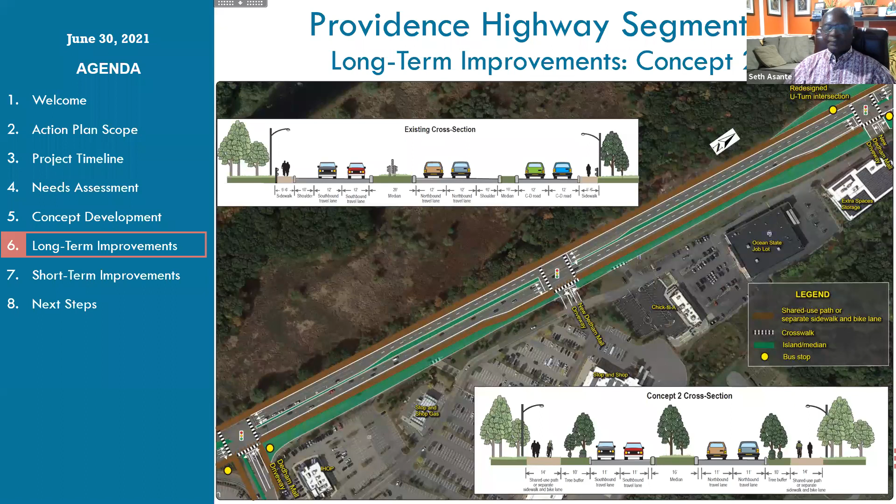This is the concept we developed for the U-turn intersection. We converted it into a signalized T intersection with connection to the mall internal road system. This concept also puts all the traffic on Providence Highway or VFW Parkway. Crosswalks are provided to connect to the pedestrian and bicycle facilities. It also includes bus stop locations for the Route 52 bus service, shown in the yellow small circles.

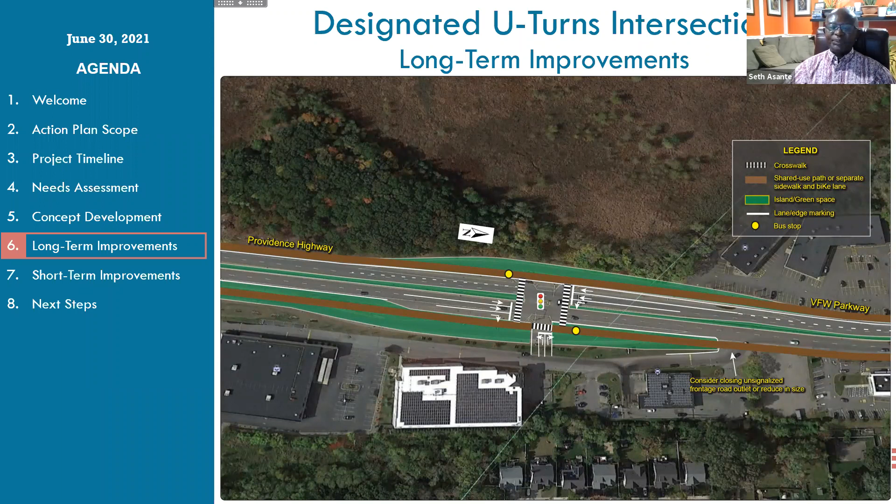Now we move on to the VFW Parkway segment in the Boston section. Here, the existing roadway has sidewalks, shoulders, and is a 4-lane roadway with 2 lanes in each direction. However, there are no bike facilities in this section.

The concept we developed for this segment has 2 travel lanes in each direction, pedestrian and bicycle facilities, a 6-foot tree buffer in each direction, as well as a median.

We also propose opening the median at 8th Street and signalizing the intersection to allow for turn maneuvers, as well as opening the median at A Street and allowing turn maneuvers. This will further reduce the circuitous traffic circulation in the segment, as well as reducing congestion at the Spring Street intersection.

Additional improvements include adding 3 bus stops in this segment for the Route 52 bus service.

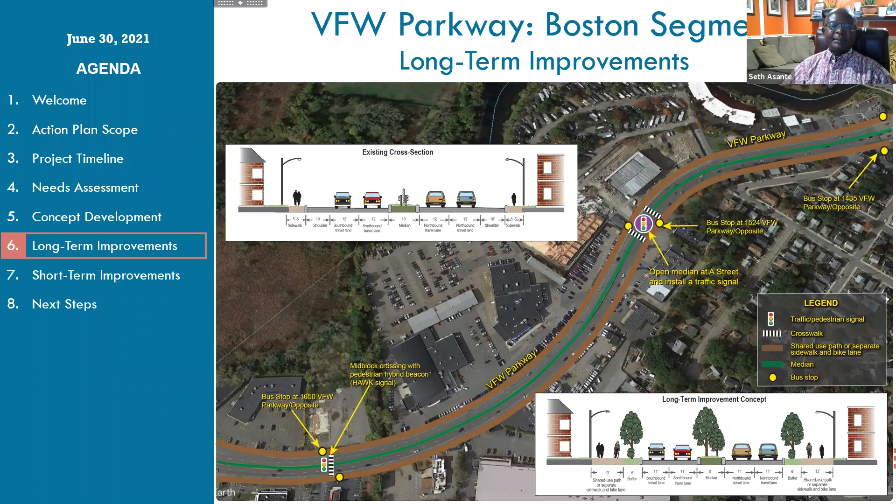Okay, so this ends the long-term improvements. This long-term improvement, as I mentioned, is for transforming the corridor into a route for all users.

At this juncture, I'm going to pause here and allow your feedback and comments on the long-term concept. We also encourage you to use the chat functions and the raise hand feature to provide your comments. Seth, thank you for that.

I just want to interject, Christian, if I may. I think you'll notice that while we had a concept for the Marine Rotary, there wasn't one for the VFW Spring Street intersection to the north in West Roxbury, Boston. We discussed this at the first meeting, that MassDOT, the state agency that regulates our highways, has been conducting what's known as a 25% design concept for that intersection. For this process, realizing MassDOT was already advancing a design, we did not take that on. That was not part of our scope of work.

The thing to note is that's been pushed back in the queue for funding, much later than we anticipated, to late 2020s. One of the things that came out of that is it's a tough nut to crack, that intersection. The left-hand turn going north at the Spring Street intersection is, as everyone knows, very backed up. We think some of what we've proposed as part of this process will alleviate that by adding a few more stoplights, which will actually reduce that queuing.

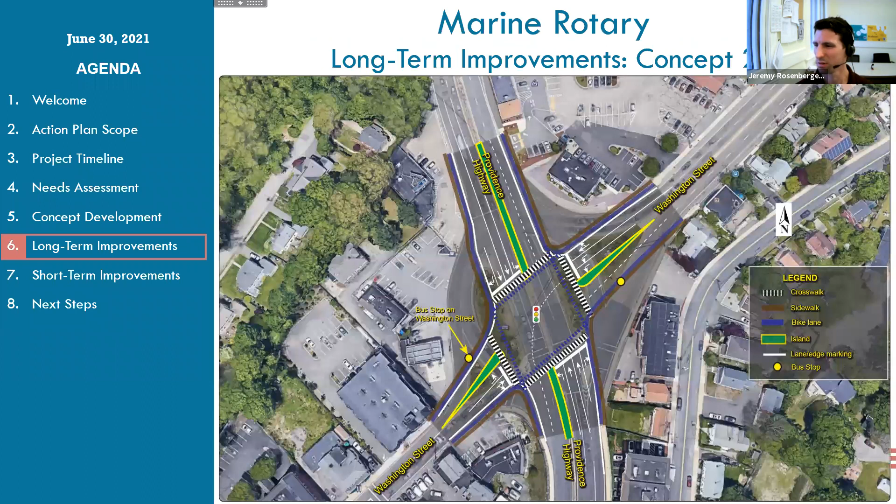Can we go to that slide if you don't mind, Christian? Absolutely, I believe it's right. Go back, one more. Forward, keep going, one more. Nope, back the other way. It's fine, one more, one more. Sorry, right there. Okay, I think that's a good visual. I don't know if Seth, if you want to handle this. Okay. And this is regarding: can the bike lane shift, and why did we put it here?

If I'm correct, yeah. So these are concepts. There's a next step that will do an actual survey and come out with a 25% design. Where we have it now is not fixed, it will be determined during the functional design. A lot of input will go into these concepts that we've developed, which will be advanced to the 25% design. So we could move the sidewalks and bike lane to get away from the roadway, but I want to emphasize there is still much more freedom to play with these concepts. I think that's the great thing about, especially this section, as I alluded to earlier, this is a very wide right of way. The right of way means the area that the state owns, and we can program for multiple uses. I believe it stretches up to 120 feet.

Hopefully I'm not exaggerating that number, Seth, but there's a home for everyone here, which is the great thing. I noticed in some chats, folks asked if we've reached out to the business and property owners along here, and yes, we have. We've had sit-downs with them because changing this carriage road has impacts to them and access to their intersections. But they also want patrons and employees to be able to get to their businesses safely. By providing these signalized intersections and getting rid of the free-for-all raceways, it provides the safety they want and makes it more desirable to come here. Providing all these amenities also makes it more desirable. So far those conversations have gone great, and we'll continue working with property owners to ensure their needs are addressed and issues aren't negatively impacting them.

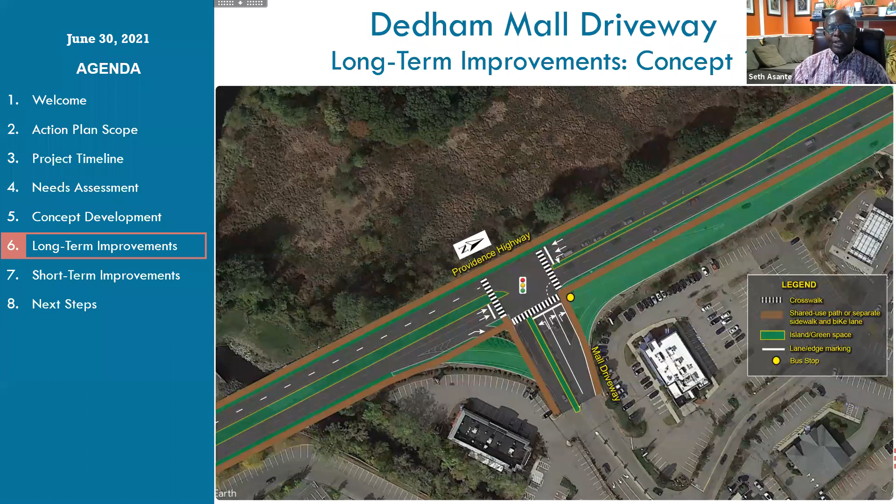As I mentioned, the character of Providence Highway and VFW Parkway varies along the corridor. For Providence Highway Segment 1, the right of way is about 84 feet. When you move to Providence Highway Segment 2, it's about 114 feet, so we have more room to move the sidewalk or bike lane out of the travel lane. So yes, that's possible, but not in Providence Highway Segment 1 or the Boston VFW Parkway segment where the businesses are close to the roadway. Depending on the section, we can make adjustments to move the sidewalk and bike lanes away from the travel lanes.

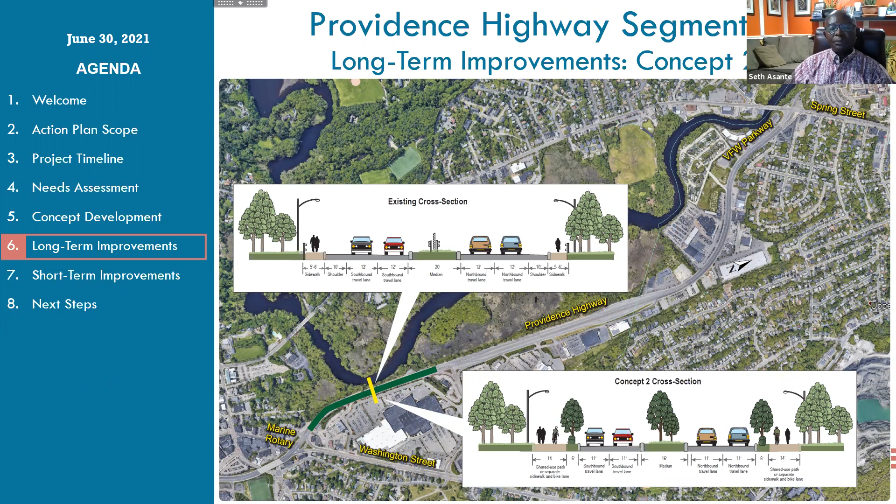We got a couple questions about eliminating the U-turn at the car wash. Most were concerned about how eliminating it might aggravate existing conditions on Bridge Street, and folks are wondering what the impact would be on things like level of service and congestion in that area. I'll let Seth handle that one.

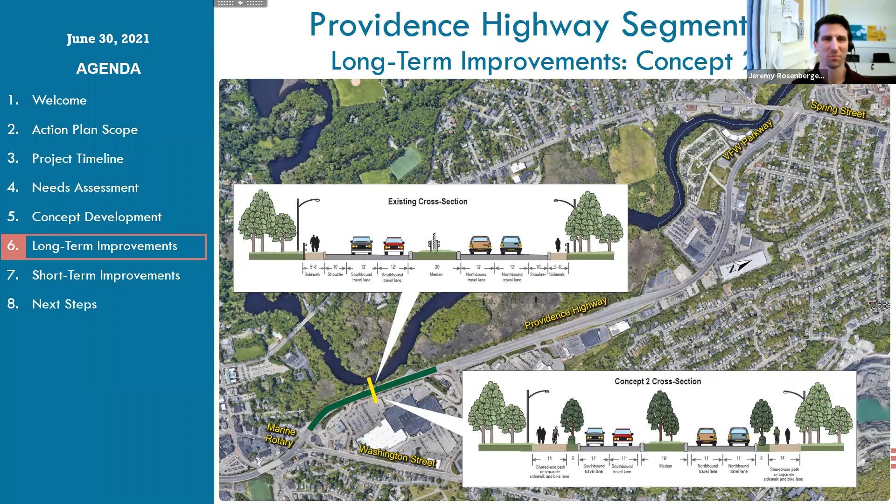So our analysis indicated that if you open the median at A Street to allow turn maneuvers, it can prevent traffic from having to go to the U-turn intersection to turn around and go north, and also people heading northbound to Spring Street making a U-turn to go south. Within Providence Highway Segment 2, we have 3 signalized intersections in that area, so all these additional intersections and openings actually help reduce congestion at the Spring Street intersection.

I might add too, where the existing U-turn is, where we're proposing a signal, we wouldn't be eliminating possible U-turns occurring there. They still would be allowed. It's just that we're eliminating those slip ramp type U-turn maneuvers that are occurring today.

Another question we received a couple versions of was about the service roads or carriage roads. Some folks are wondering if removing the service road would add roadway friction to the main roadway, feeling like the service road makes the corridor more drivable now. Seth, would you speak to the rationale for removing the carriage roads?

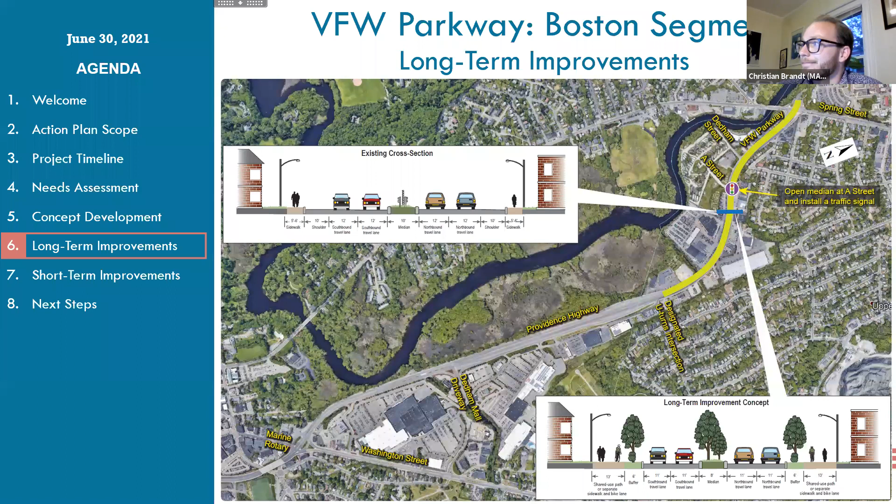I think we do need to move on to the short-term concepts, and I think in some cases the short-term presentation that Seth is going to give might answer some of your questions that we may not have gotten to. Okay, thank you Jeremy.

And Christian, so obviously, as Jeremy mentioned, the long-term concepts are going to take some time to implement. And because of that, we created short-term improvement concepts that use or modify the existing roadway features to improve safety and also create space for accommodating pedestrian and bicycle. As I mentioned, I will describe the short-term improvement starting from the Marine Rotary and then head north through the corridor.

We did this and analyzed the whole intersection again, and by changing the crosswalk distances and also moving them to make it safer, it will not impact much traffic movement at the Rotary.

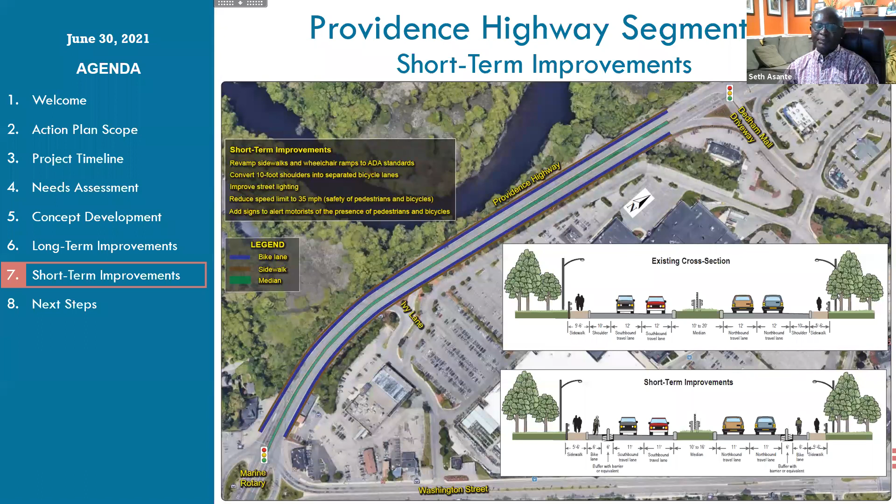At the Dedham Mall driveway intersection, the short-term improvements include upgrading the sidewalk. Currently, there are no crosswalks at the intersection. So the improvements include upgrading the sidewalk and wheelchair ramps to ADA standards, adding crosswalks and accessible pedestrian signals at the intersection to make it safer for pedestrians, including installation of bicycle detection and extending the bicycle lanes through the intersection safely, and additionally adding more signs and pavement markings to alert motorists of the presence of pedestrians and bicycles.

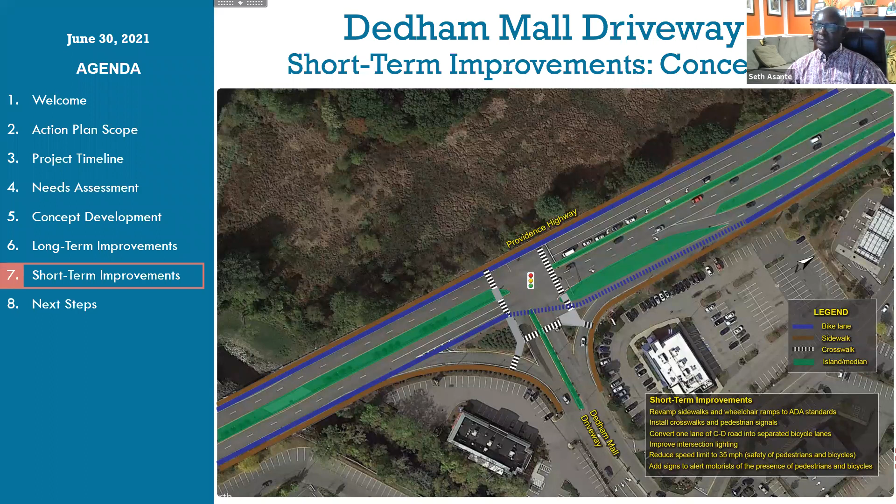For the Providence Highway Segment 2, the short-term improvement also deals with poor sidewalk and wheelchair ramps and bike lanes. We propose upgrading the poor sidewalk and wheelchair ramps, reducing the lane widths to calm traffic, and converting the 10-foot shoulders on the west side of the roadway into a bicycle lane, and to the right, taking one lane off the carriage road and converting it into a separated bicycle lane with physical barrier separating the bicycle lane from vehicular traffic, and adding more crosswalks in the vicinity to facilitate pedestrian crossing. The short-term improvement concept is shown at the bottom of the slide.

For the U-turn intersection, the short-term improvements include upgrading sidewalk and wheelchair ramps, adding a crosswalk at the intersection to help pedestrians cross, and connecting the bicycle lanes in the segment. We are also recommending additional signs to alert motorists of the presence of pedestrians and bicycles. Another improvement in this segment is to close the slip lanes for through traffic at the intersection to improve safety and reduce speeding in the segment.

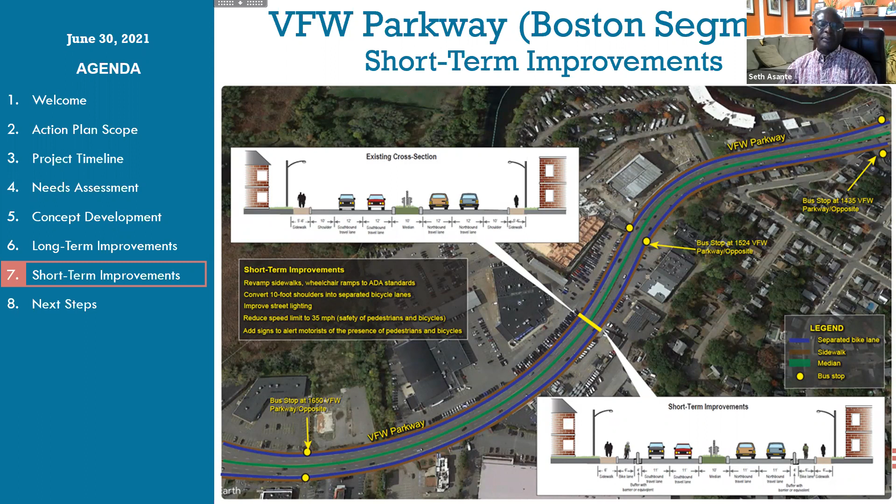So this ends the short-term improvements. I'm going to pause here and allow for your feedback and comments on the short-term improvements.

If I might just note, Christian, first, our intention, we would love to implement this long-term concept before the short-term, but realizing there are a lot of projects vying for only so much money for our roadway. Hopefully that will change in coming years, but at least for now, we are cognizant that there are projects in the queue ahead of us and that it takes time to get to that money. So we wanted to provide some short-term improvements that would go a long way. It won't be as much of a revision as we've shown in the long term, but I think it's a good short-term approach. So thank you, I just wanted to add that in.

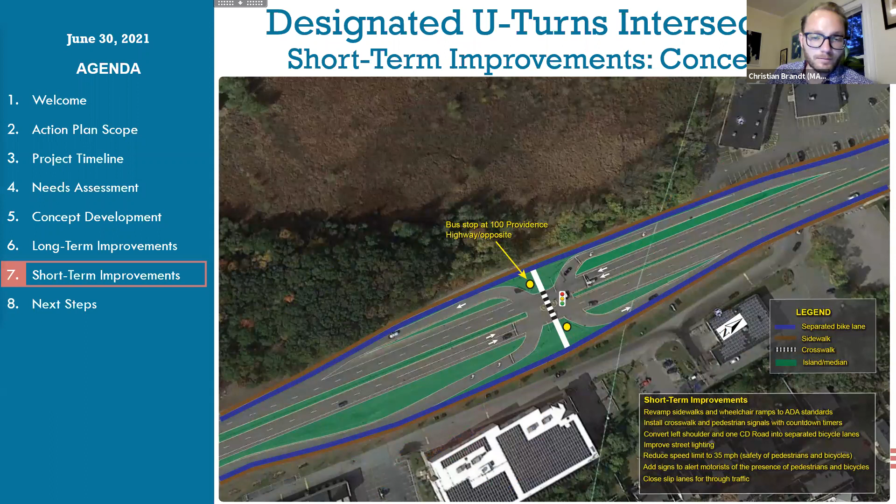Yeah, Christian, if you can show them one of the slides. And now go to maybe Providence Highway. So as you can see, between the vehicles and the bike lane, we have a physical barrier. It can be a Jersey barrier or an equivalent to separate bicycles from the vehicular travel lanes. We did this because it's a high-speed lane, and it's required to separate pedestrian bicycles from the travel lanes to improve safety and also to encourage people to use the bike lane. So there is a physical barrier for all the bike lanes in this short-term improvement.

Great, thank you, Seth. So I think there's been a couple of other questions that dovetail on some that we discussed in the long-term solutions, but some folks were wondering whether traffic calming, what the impact of traffic calming will be on congestion, and feeling like traffic calming might actually just add to congestion. So Seth, if you could speak a little bit to the impact of that, that would be great.

Yeah, actually, one of the problems we identified in the corridor is high speed within the corridor, and also a lot of crashes. There was one fatality that happened at the Marine Rotary. So throughout the design of the concept, we were aiming to improve safety in every way. And by doing so, the concept that we have were designed in such a way to narrow the roadway and also implement a more signalized intersection to reduce speeds. But none of these concepts is going to invite more traffic or create congestion within the corridor. It's just to slow down the vehicular traffic to about 30 or 35 miles per hour in the corridor, which will be safer for pedestrians and bicycles.

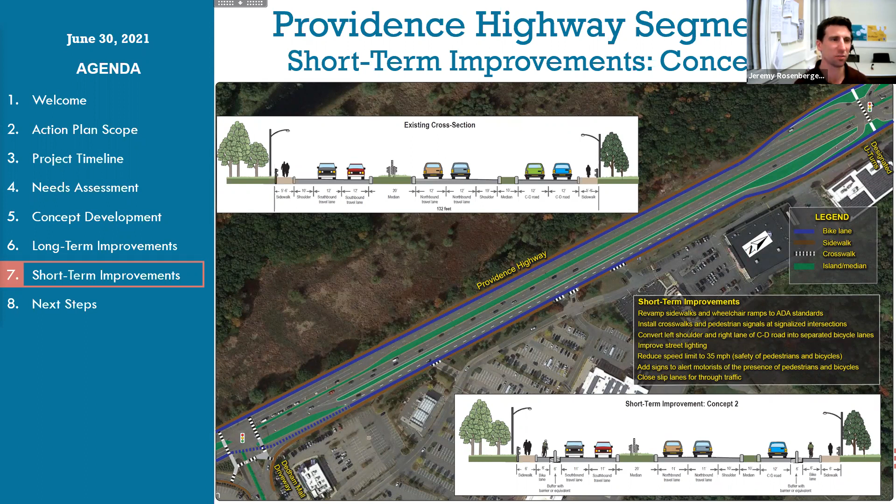So I think the last thing is more of a clarification. There were some questions about a taking happening in the corridor, and your clarification was that's not something you expect to happen. No, maybe I stirred the pot when I talked about the Town of Dedham acquiring land—that was actually a gift of otherwise undevelopable land. But along the corridor, we don't have any planned takings as of yet. When we get to 25% design, the next phase, we'll really get into the land and how much is open for this project. It appears there's an abundance of roadway that will meet all our needs, and no land takings are likely going to need to happen.

It's actually counter to that—there's going to be more available land, and how that's used is yet to be determined, especially when I talk about the Marine Rotary. Along the Providence Highway, our conceptual iterations show turning that side travel lane, or carriage road, into green space. I hope that clarifies that.